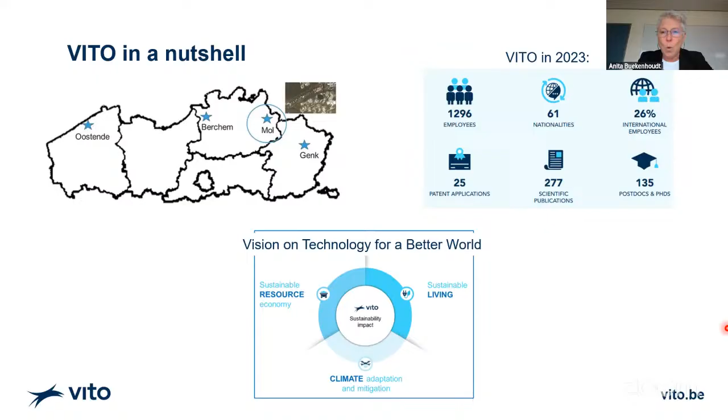One big part of what VITO does is applied research, meaning that we work together with universities, looking more to the fundamental research, and on the other hand work together with industry to find solutions for real industrial problems. This makes that we typically work at higher TRL levels, so from 3 to 7, coming already to pilot scale or demonstration.

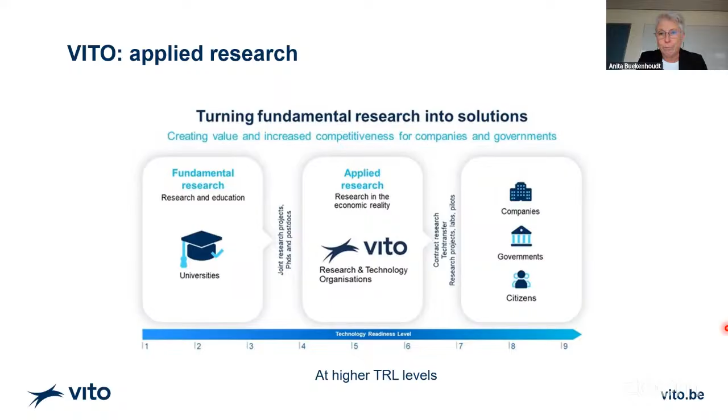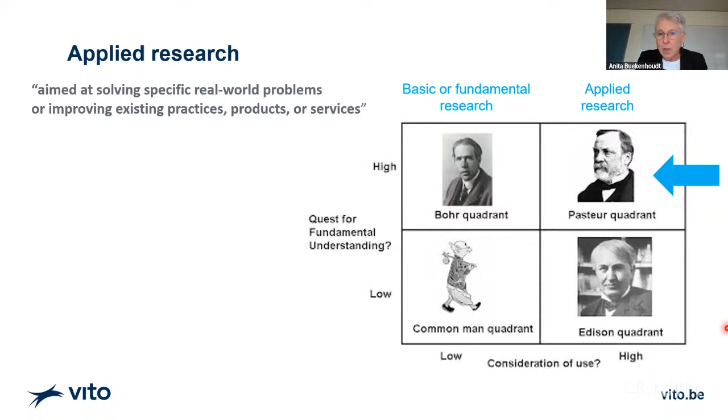Now, of course, when you work with industry, it doesn't stop with experimental feasibility. You also have to show them that it works long term, that it is a robust process at bigger scale, and that it's also economically feasible - because if it's not feasible economically, if there is no value there, it will never be implemented. On top of that, it's very interesting when, preferably, you are able to model your solution, the process, or model the transport of a membrane and predict it. That helps to implement it in industry.

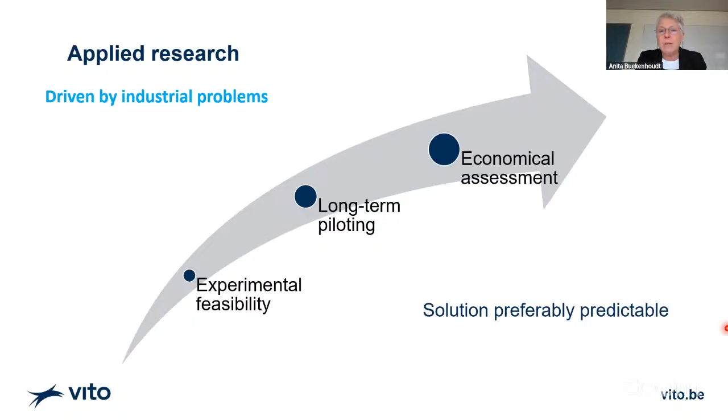So VITO in general is working in this way. I'm working in the membrane group, the membrane team that is nowadays called MESH, and our current focus has been on liquid separations. I guess in the future we will go back to also partly gas separation - we did it in the past - but for the moment, and my presentation is focused on, liquid separations.

Of course we all know that in chemical industry there's a lot of separations around, and these separations cost a lot of time and money, and they're mainly done now by thermal processes. So replacing them, being able to replace part of them by membranes, would lead us to a much greener chemistry. Now when we look particularly at separations in chemical industry, you're often dealing with very small molecules that need to be removed or fractionated. So we focus a lot on the tighter membrane processes, being organic solvent nanofiltration - that's been the focus from the start of this process - pervaporation, and nowadays a lot of membrane contactors, both membrane distillation and membrane extraction.

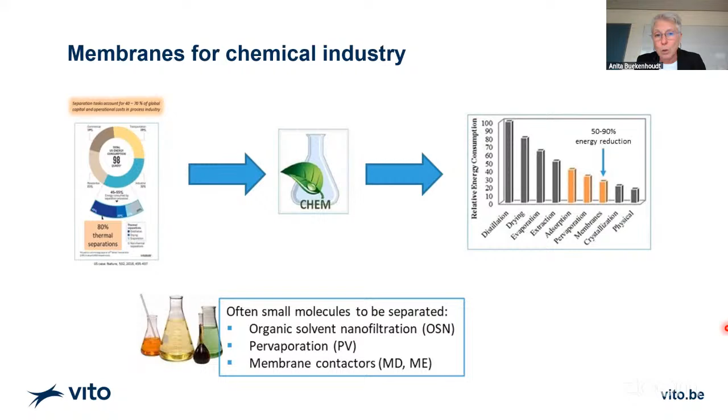We work with all types, a variety of sectors in the chemical industry, from oil and gas and base chemical producers up to more fine chemistry, and a lot with pharma. We have been working a lot with J&J. Janssen Pharmaceutica is really nearby us, so we did quite a lot of projects with them, and also a lot of biotech nowadays.

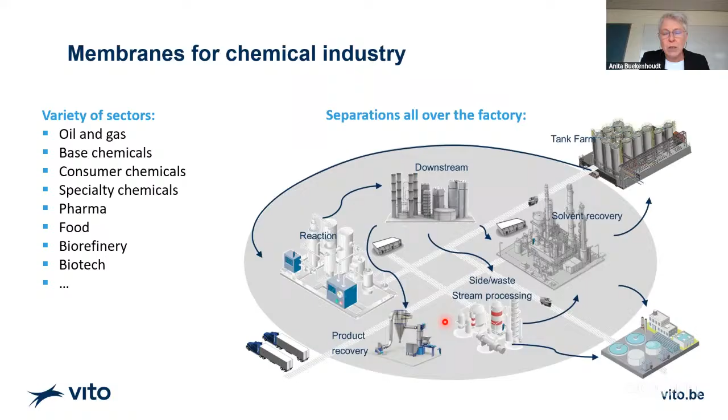Of course, we look at separations and replacing or adding membranes in every aspect of the factory, not only the reaction where we try to add a membrane to come to process intensification, but of course also downstream, solvent recovery, side stream processing, product recovery from the downstream and from the side streams. So we look at membranes everywhere in the chemical process. We've done projects all over.

So it also means that we do not only look at membranes on itself for purification, concentration, solvent recycling, but also hybrid processing, together with distillation to debottleneck distillations, or solvent recycling before an extraction step, or solvent swap before a lyophilization. These are a few of the examples we did.

And then, as I already said before, there's this integrated separation where we really couple the membrane to a reactor. So we can shift the equilibria, we can avoid side reactions. We did a lot on high dilution reactions to improve the solvent use, and we also did a lot in reusing the catalyst for a longer time in the same reaction. So in other words, that gives you the possibility to produce more with much less.

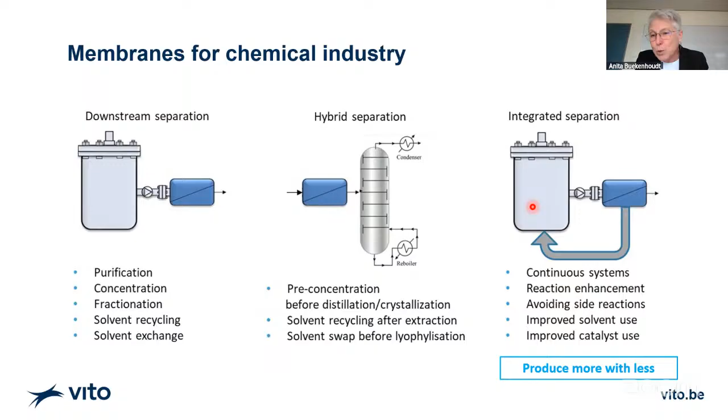Anyway, when you work with industry, there are some specific challenges or requirements. When you look purely at the membranes, they typically don't like you to work with something you have made in the lab that stays at lab scale. They want a solution, so it means they need the membrane that you propose to be commercially available at scale.

In our case, we always make our instruments very flexible so that they can work with polymeric and ceramic membranes. I have a particular affinity to ceramic membranes, but we only use them, of course, when it's relevant. It does not necessarily mean these are all membranes already on the market. They can also be in-house developed, but there has to be a clear track to bring them on the market. That's what the industry typically asks.

Now, as to operations, you stick to testing process parameters that are very close to what you will use when you implement this. For instance, if you have a pressure-driven process, you use cross-flow and not dead end. We actually almost never use dead end at Vito, because we've also seen a lot of differences, especially in solvents. So always cross-flow. When you work with pervaporation, this means you work with realistic vacuum. For membrane distillation, it means you work with realistic temperature differences and temperature levels. So anyway, you work with the temperature of the feed like it will be available in the company.

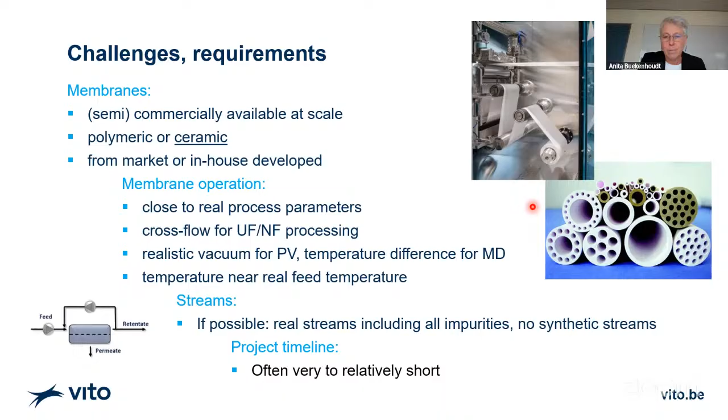So if you look at such a typical project, it starts, of course, with a membrane screening at liter scale. I give here the instrumentation that we have for OSN. We start with the selected membranes, polymer, ceramic. You see here it's flexible - this allows us to put many different types of modules here. So you see now a single tubular ceramic membrane, but it can also be a flat sheet polymeric membrane. Sometimes we already look a bit at temperature differences or the influence of transmembrane pressure.

Next step, when you have selected one or two best membranes, you go over to a proof of concept, but you do this already at a bigger scale. This bigger scale typically involves 5-liter feed vessels. This allows you a bigger membrane already in a module. So if you think of a polymeric membrane, you think of a 2540 or a little bit smaller module, spiral wound module for instance, which already has the potting material that you can test for robustness. In this study, we do the full process - full concentration, full diafiltration, this type of stuff.

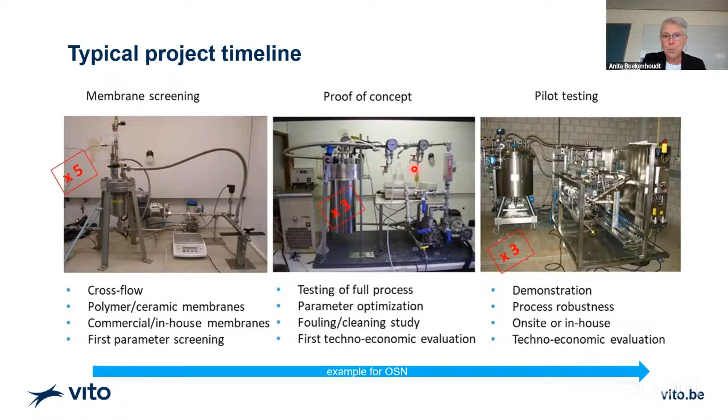As OSN is also very interesting for pharma, we decided at Vito to invest also in our pilots being GMP. So 2 of the 3 pilots are good manufacturing practice proof, let's say, following the rules that are applicable in pharma industry. And you see here pictures of the pilots we have in different projects that we started from small, from the screening up to the piloting work.

The first pilot we had, we had a very nice project together with DSM. It was the recovery of an API in a distillation residue that they were actually piling up because they knew there was still a lot of money in there, but they didn't know how to take it out. By just methanol dilution followed by concentration and diafiltration, we could really recover this API. It was done with membranes that they screened themselves. There was a very nice piloting campaign of about 1 year with 24/7 operation, not a lot of difficulties with fouling. So it was really a very successful project.

Later on, we did in the Netherlands a project with Bunge, which is an edible oil manufacturer, and we did their acetone recovery in order to intensify their distillation. And here we tested both polymeric membranes and our grafted ceramic membranes. I will say a little bit more about our membranes later. This was, I think, the first demonstration of our membranes at this scale. And there was also a good economical evaluation.

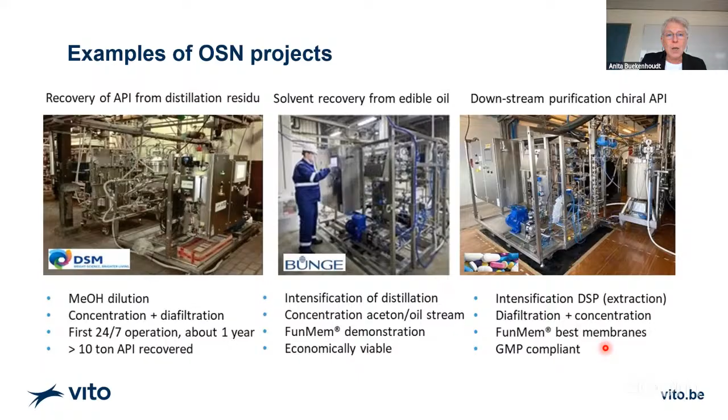Now, I'm gonna dig a little bit deeper into a few examples, telling you more how we work in detail. So the first thing is on the synthesis of membranes, so customizing surface modification of ceramic membranes in order to create flexibility on the ceramic membranes, which are typically metal oxide membranes with a lot of OH groups on the surface, meaning that they are typically very hydrophilic.

So we started back in 2009-10 together with a postdoc from University of Antwerp. We started developing a grafting method based on Grignard chemistry, and we did this not on flat sheet membranes. We did this directly on single tubular membranes where we know that the quality, the porosity, and so on is very similar to the next step, multi-channel membranes. If you do this on flat membranes, it's of course possible, but you will have to revisit your synthesis procedure again because there is so much difference between a flat sheet and single tubes. So that's what we did.

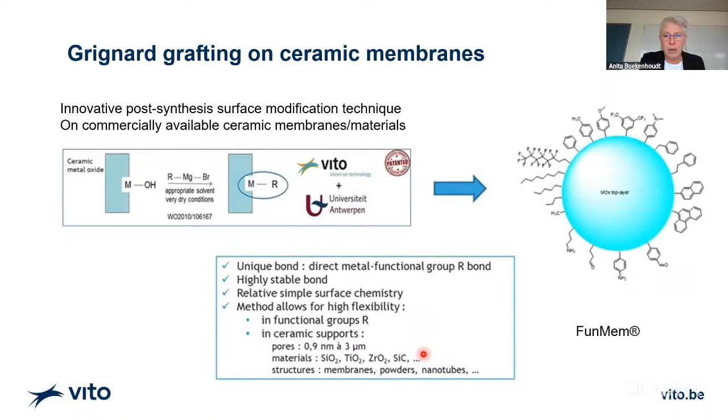We are very flexible in what we can make, not only in the type of groups we can put there. You see some of the possibilities that we made over the years, but also in the type of materials we can work with, the pore size, the materials. It doesn't even have to be membranes, of course. It's possible to work on powders, on nanotubes, on flat sheets. Of course, this has allowed us to what we like to call play with the affinity of the membranes.

And we did this in several ways. We had a very good postdoc, Sarah Hosseinabadi, who looked, of course, to solvent filtration. And we were able to show that by increasing the membrane solvent affinity, we get much better performance. And in some cases where we really boost the membrane solute affinity, you can find some kind of chromatography type of performance.

And we had about the same time another PhD, Ghulam Mustafa, who was digging into anti-fouling effects of this grafting, and we were able to show clearly that with metal grafted membranes, you can have really nice anti-fouling effects, higher fluxes, lower decrease of your flux, and in some cases, even higher retentions.

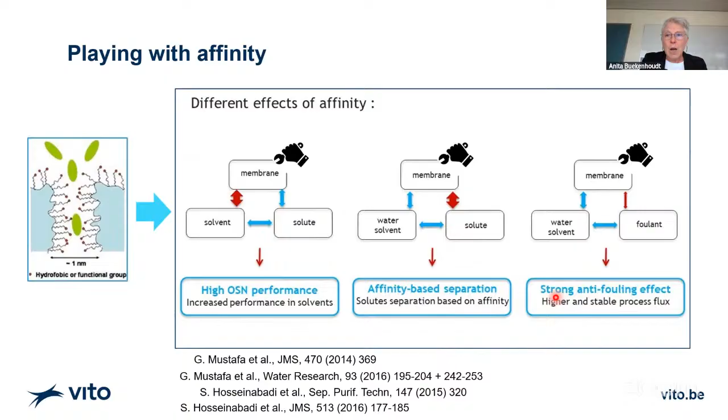Anyway, we were able to play around with our membrane affinity, and in this way, we were actually learning also a lot about what's happening in solvents and what's happening with fouling. So not in that aspect that we can really predict it, but we got clearly a lot of extra understanding.

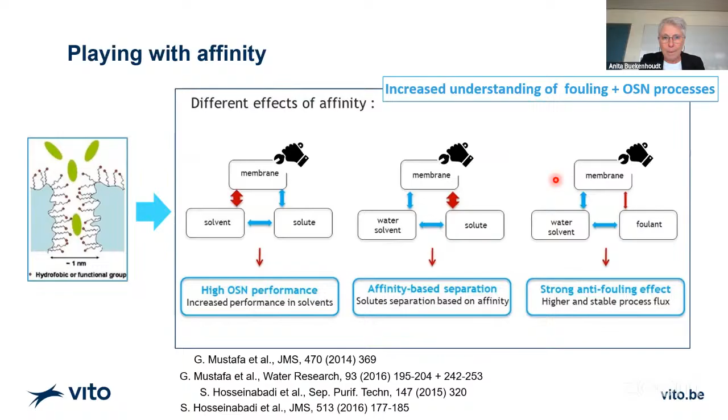Now, once we knew that this grafting gave us very nice membranes, we started to think about upscaling and how to make them on a bigger scale. So we started, of course, first with the small tubes in stirring and shaking instrumentation, glassware. But quite fast, we started working in a glove box. Grignard is not the easy chemistry. You have to work in very dry circumstances. So in a glove box and under filtration conditions.

This worked pretty well, and we used this glove box to extend it and be able to put a multi-channel membrane there of 1 meter 20. And also this, we were able to process very well. And then we went over in 2017 to build a machine where we could make 5 membranes at the same time. And then later on, we even upscaled this to 10 membranes, and also being a bit more flexible in the design of the multi-channel membranes we could work with.

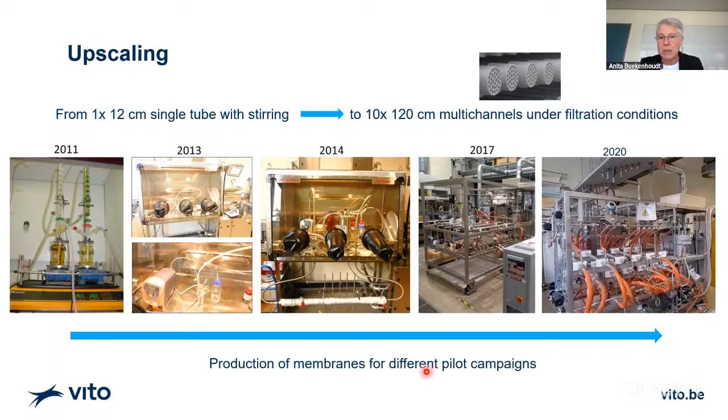Anyway, these two last machines gave us the possibility to produce these membranes for many different pilot campaigns, like I showed before. With the bigger machines, we were able to do also a very good economic evaluation to evaluate the cost of this grafting, to determine the factors that are the most important. And something like the dry solvent is very important here. And we could also pinpoint how to make it even better, how to change the process if you want to make larger amounts.

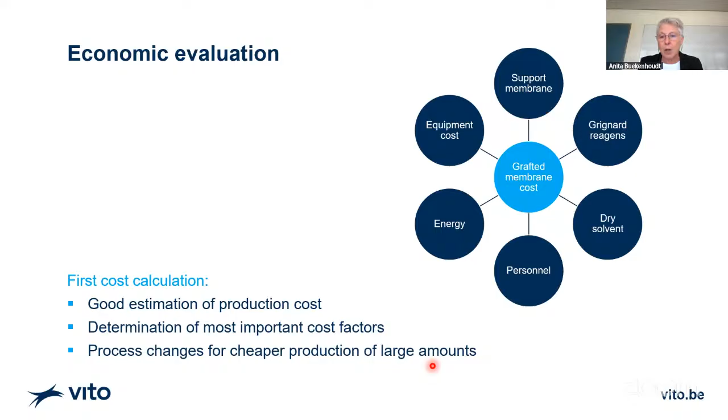And this has led also to the creation of the spin-off at the end of '21. It's called A-Membranes. It's led by Bart Koen, and he's building out this equipment now to really make large-scale production himself. We still have, of course, a good collaboration with all our spin-offs, by the way. A-Membranes is more in the first years after creation, but we had earlier very nice transfer projects.

And I just mention here the Zirfon separators. This Zirfon stands for mixed matrix membrane, zirconia particles inside of polysulfone, and they turned out to be very good separators with better performance in alkaline electrolysis. And it's, of course, boosting because of green hydrogen production. We have been working for a long time now with AGFA on this topic, and they brought the first generation of membranes on the market in 2007, and they're running more than 100 installations now. They also recently got very nice extra funding to upscale production of even further generations of these separators.

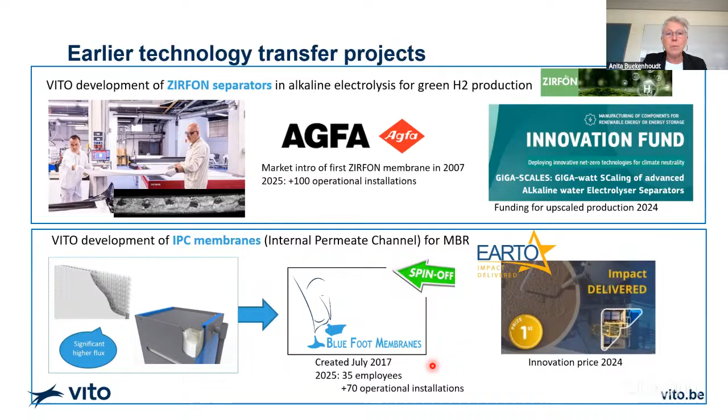And more recently, we had IPC membranes, internal permeate channel membranes, backwashable membranes typically for MBR, with significantly higher flux. We had there the creation of the spin-off Blue Foot Membranes in 2017. They're doing very well. They have 35 employees. There are a lot of operational installations, and they just got a very prestigious prize last year. So that's a bit how we deal with synthesis of membranes at VITO.

Now let's have an example of use of membranes, and I dig in here a bit deeper into a project that is still running. It's now in the last 6 months. And it's dealing with re-refining of used lubricant oil. The project is called CUMERI, nice consortium.

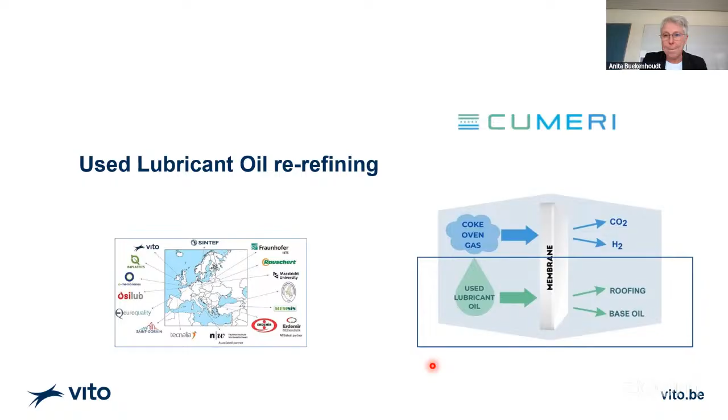And used lubricant oil is actually very well collected, especially in Europe. And a big part of it, 1 million ton each year, is re-refined, mainly by distillation now, by 27 refiners in Europe, bigger and smaller ones, that deliver again clean oil that can be used to make pure lubricant oil again that can be reused.

Now, if you look to what is in this used lubricant oil, like you see, it's of course nicely black, like it comes out of your car when you replace the oil. What's in it is, of course, the base oil that is typically used to make these lubricants. And there are also a lot of additives in lubricant oil. These additives give you the lubrication effect, but they also avoid wear and corrosion. These additives are typically surfactant-like molecules, like you see here, and they typically contain metals.

These give you, of course, a lot of impurities in the stream, and there are also minor impurities coming from the use, which is water, diesel, and naphtha. Of course, lubricant oil in itself is very viscous, but this dirty oil is especially viscous. We talk here about kinematic viscosities, 50 centistokes at 40 degrees. So it's really challenging, and that's where we think of using membranes at higher temperature, particularly ceramic membranes. The idea is to remove everything that doesn't need to be there and end up with a nice brownish colored base oil.

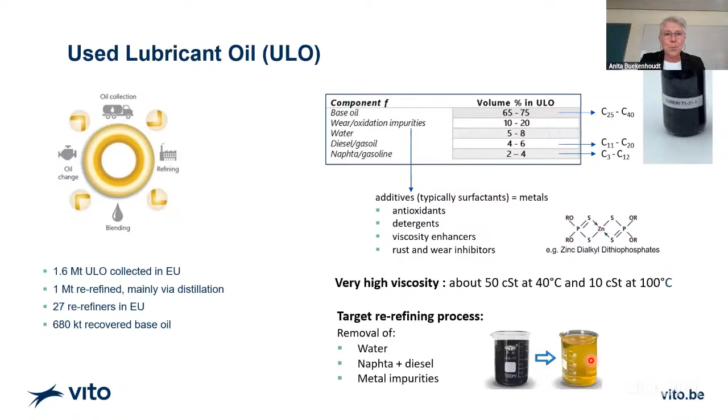Now, typically, such a re-refining process is currently done with evaporation or a lot of distillation processes. It's a quite tedious distillation. Often there is a pre-treatment before to remove the water, and often there is a post-treatment with hydrogen to remove the last bits of sulfur. In this project of CUMERI, we work together with a French company, Osilub, located in Le Havre. It's actually a collaboration between Veolia, the collectors of the waste oil, and Total, that can use the refined oil to make new lubricants.

You see their process here, and it's a three-step distillation with the first column at relatively low temperature to remove the water, then the second column to remove the diesel already at 260 degrees, and then the last column, the real column, giving you the removal of the impurities, which is under vacuum and at 350 degrees. This gives you the base oil, and on the bottom it gives you a roofing type of material, so really very viscous material. They're one of the bigger refiners in Europe. Now, for us, we want to find an alternative with ceramic membranes.

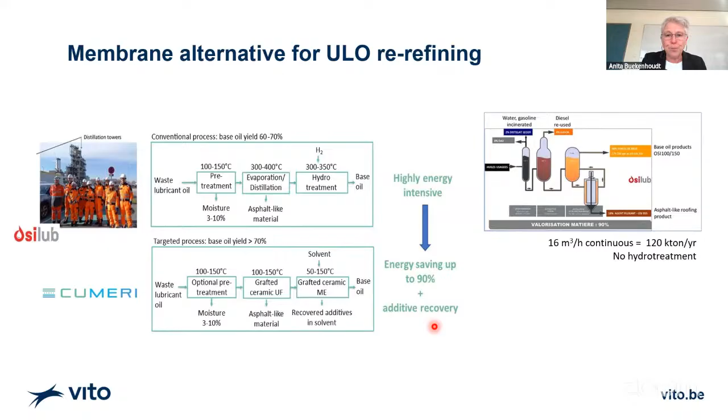In the beginning, we thought of this process. Maybe we still need a water remover or another pre-treatment. And then ceramic membranes, to remove most of the metals and to create this asphalt-like retentate, and then a polishing step by membrane extraction. By this, we would be able to reduce a lot of the energy use. First, we did a few experiments. We had some experience there, but already in the first 6 months of the project, we performed a preliminary economic evaluation. That is very interesting to do. So we compared the Osilub process, we had very good information from the company, with our targeted process.

We looked at the capex cost, investment cost, and the operational cost, and we saw very quickly, but that's not so strange, that it's cheapest when you don't have to do any pretreatment. And when it is possible to remove this, you have a capex cost that can be 2 times lower than the benchmark, while the opex cost is about the same. And it's actually driven by this blue part here, which comes from the cost of the used oil. So Osilub has to pay Veolia to be able to work with the collected oil.

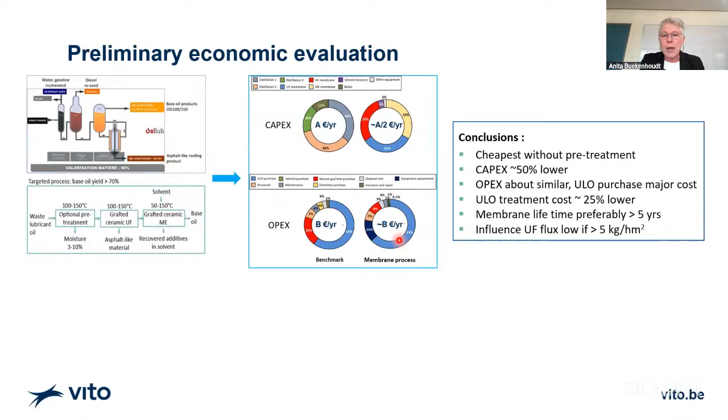Now, you put in membrane fluxes and membrane transfer coefficients that you get from first experiments, but it's a bit a question mark where you're going to end up. To cover this, you typically do a sensitivity analysis. We did this here for membrane lifetime and for the UF flux. The black curve is the cost without any pre-treatment, others are with pre-treatment, and the blue line is the benchmark cost. So as long as your membrane has a nice lifetime, preferably longer than 5 years, it's fine. It's not necessary that it is 10 or 20 years, because the cost doesn't change a lot. Also, in view of flux, it gives you a target that your membrane flux doesn't need to be much higher than 5 LMH.

So this, or kilogram in this, per hour per square meter. So these things are very interesting to get some targets for your membrane, even when you start such a project. And we had actually a specific PhD which did only economic evaluation for membrane extraction in three very different applications. She has made three papers about this. You can find the solutions there. It's very interesting what can come out of a very early economic evaluation in view of membrane targets, material targets. So I would recommend it.

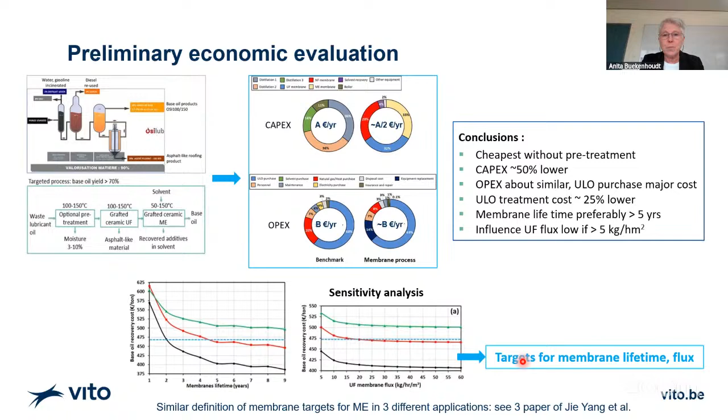And we have a second generation of grafting, which is polymer brush grafting. So he used all this to have really a huge amount of membranes, which we tested all at 110, 120 degrees. Of course, then your loops have to be very well isolated, otherwise you cannot keep this. We're working on a paper. It will be submitted very soon on the full results of this screening.

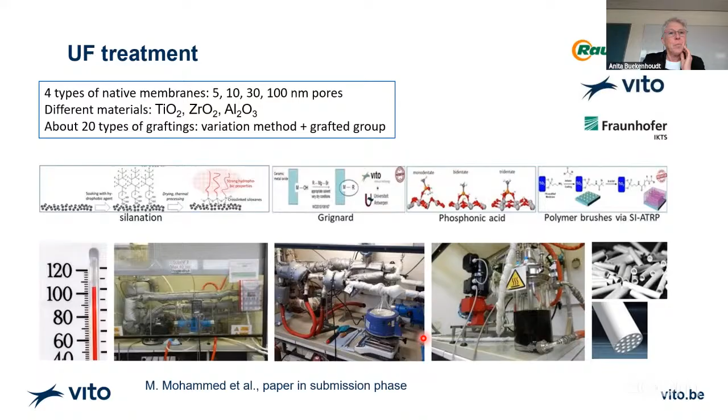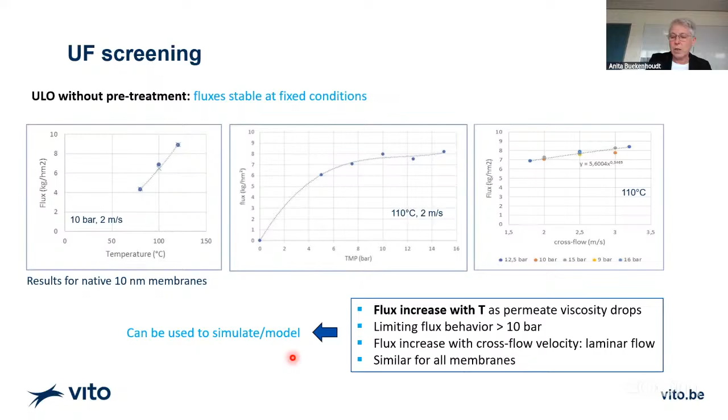And it's also valuable to increase a bit the cross-flow velocity. And this evolution is actually following the laminar flow behavior. Very similar for all membranes. And this knowledge can be, of course, used to simulate, to model the process. And you see here what the permeate quality is like. You see a lot of parameters here.

First, the water content, viscosity, acidity number, oxidation, nitration level, diesel, naphtha, and then all metals that you can find in this stream, divided into additive metals, fouling metals from, for instance, sand, silicon, and then everything that can come out of the motor, aluminium, iron, these type of things. So in blue, you see the feeds. In orange, you see the permeate of the 10 nanometer native membrane in this case. And then in green is the product of OSIL150. So this is our goal.

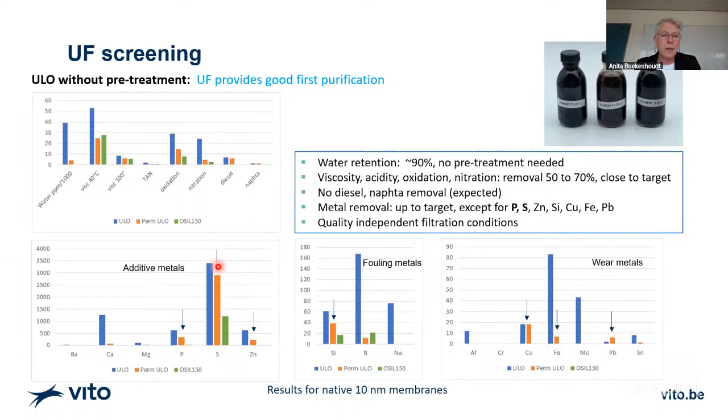You see that the UF is actually doing a very, very good first purification. And unexpectedly, we had a lot of water removal. And the water is probably complexed, emulsified. It's not very clear in this stream, giving us this over 90% retention. All other parameters, you see a very nice removal, becoming very close to the goal. Of course, diesel and naphtha are not removed. And then in view of metals, we remove a lot of them, except for these with an arrow. And especially sulfur is probably very small molecules, and it's impossible to remove with UF.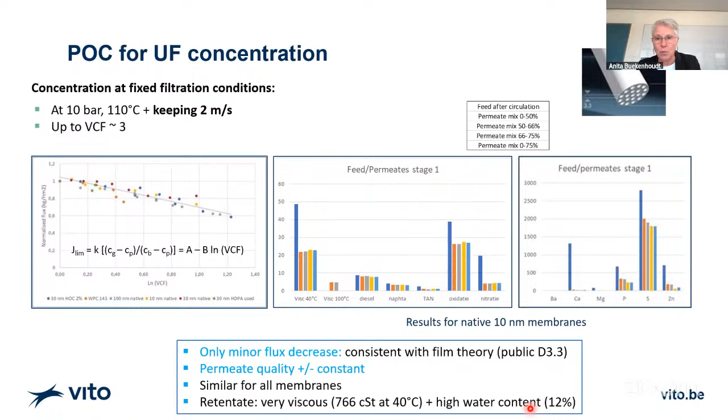And of course, in the end, we have a retentate that is enormously viscous, where you need to keep your high temperature to get it out of the unit. And the water content you find in the retentate is consistent with our 90+% retention of water. So, okay, this is the UF process. We have a polishing step after that, which is ME. Of course, we did screening first too.

Screening in that case is liquid-liquid extraction tests on the UF permeate that we made in this concentration tests. And yeah, a lot of solvents are possible. Very interesting are ethanol, NMP, DMA. And we saw actually that there is a very nice correlation with the Hansen parameters and the extraction efficiencies. And if you're very high in extraction efficiency, you also have nice decoloration.

Also, in most cases, you form very strong emulsions, very difficult to phase separate. So using a membrane in the process is very advantageous. And of course, for membranes, we go for hydrophobic membranes made by silanization by our Fraunhofer partners. And we work with 100, 200 nanometer membranes there.

We are very happy to have Basel high school there, and they've done a lot of testing also for membrane extraction, and they have tested over 14 days the very robust process with ethanol at, in this case, relatively low temperatures. The mass transfer coefficient is then relatively low, but by now we know we can increase this by using high boiler solvents, of course, and using much higher hydrodynamics.

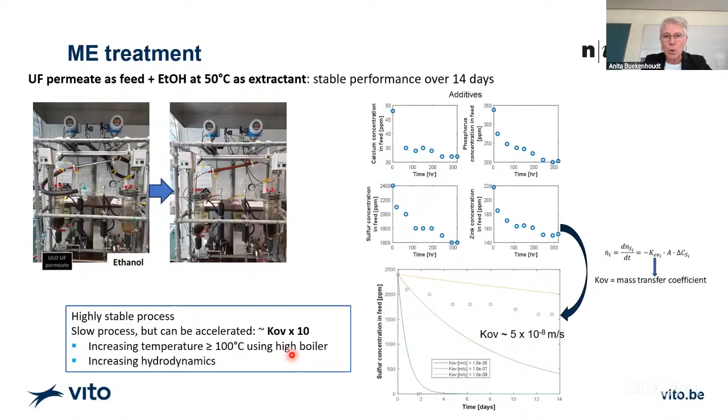Now, as we always do, we want to pilot this, and we are doing this right now. We use for that one of our high temperature pilots that can work until 130 degrees. We adapted it a bit, in this way that we have now a back pulse possibility on the pilot. And we can use this backflush system also as the extractant loop of the ME. So it gives us a possibility to test both UF and ME.

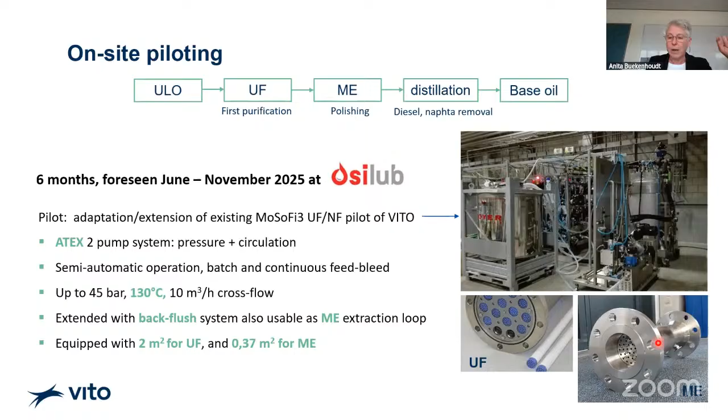You see here we chose 8 multi-channel membranes for the UF part, having 2 square meters of membranes, and then a 0.37 square meter single tubular module for the ME part. You see nicely how after testing at Vito, we transported to Osilub, and that's where it is located. You see a few pictures here.

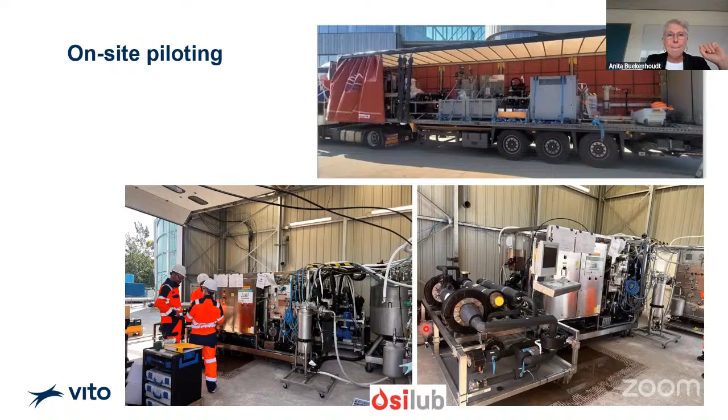There is also very long stability of the flux in isoconcentration mode. We could restart with a new batch of ULO after just a short permeate rinse, so there are really no big fouling issues. It's an extremely robust process. We can conclude this. And ME piloting is going on right now, and we will, of course, present the results later on in other presentations.

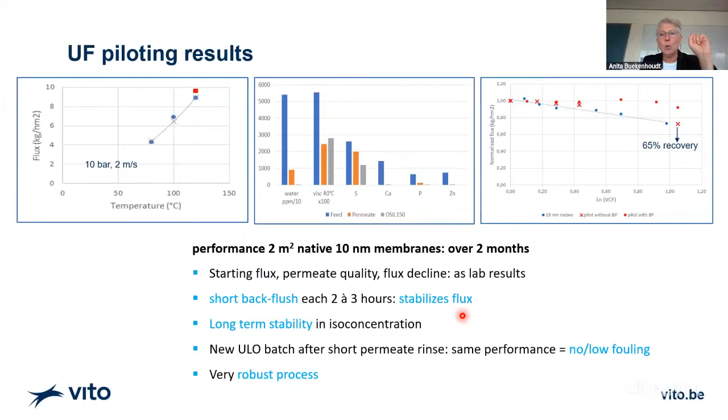So we had a synthesis project presentation. We had a presentation of an application project. Let's now look at what we do right now at Vito on prediction. And of course, lots of us learned a lot on OSN, but not to this level to predict the OSN process. And then, like Gyorgy and his team are doing at KAUST, we look at data-driven modeling here.

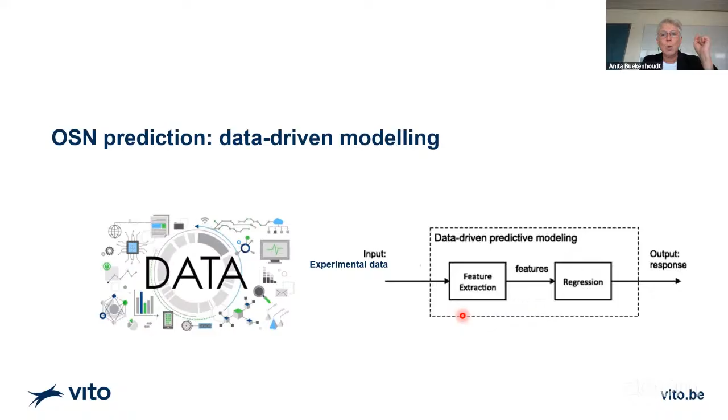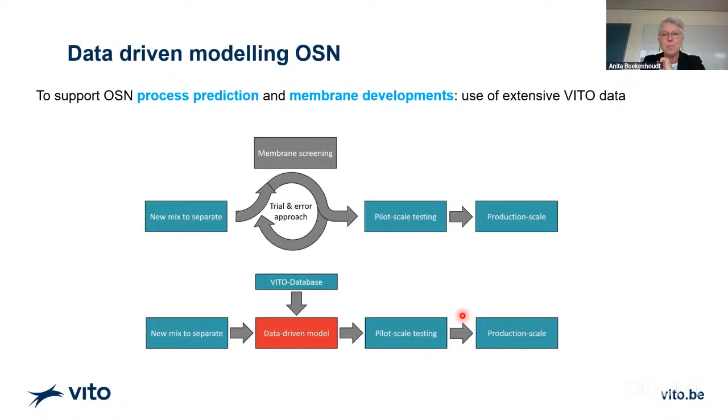And of course, we want to use the extensive data we have at Vito in order to, on one side, get rid of the very intensive and time-consuming membrane screening, but also the other way around, to be able to define the best membrane with the best chemistry for a particular separation. Now at Vito, our data, especially in solvents, we have a lot of ceramic data.

And the good thing about data sets from ceramic membranes is, of course, that these membranes are not swelling. So meaning that there is one effect of OSN of the solvent that is not there. So I always looked at it when somebody can disentangle what is happening here.

The ceramic data is very important, or can really help here. Of course, we characterize the solvent, the solute, and the membrane and the test conditions by different parameters, like we all do. And we compared a bit the KAUST database. I didn't look yet at the database from Leuven, the bigger database. And you see here the KAUST database in blue and the Vito database in red.

So in general, our ranges of parameters are in general bigger. This is, of course, because I think ceramics are, and with grafting, we are more to the polar side and intermediate polarity side, and a bit like I mentioned in the beginning in the questions of Gyorgy, we are a bit on the higher pore size compared to the polymeric membranes.

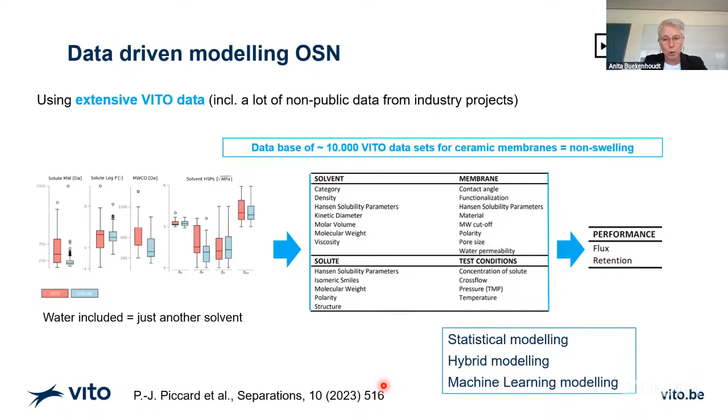Okay, you can see some of the background in Peter Jan's first publication. What he is doing is looking at different types of modeling, not only statistical modeling, but also hybrid modeling and full machine learning AI modeling.

I show here some of the results that he recently published. And we focused here on results of NF membranes, 0.9 nanometer, titanium membranes, 450 Daltons, native and C1 grafted with our Grignard grafting method. And we looked first statistically to the results.

You see here the correlation between flux and flux times viscosity. Flux times viscosity are the higher bars as function of different aspects, different parameters, different solvent parameters, solvent characteristics. And actually, what we see is there are huge correlation coefficients. Actually, solvent has a huge influence on the flux.

Not only you see here a lot of polarity characteristics, but also the size of the solvent is quite important. And what we see also is, of course, if you take out already one part of the viscosity effect by multiplying flux by viscosity, correlations get higher.

And the correlations for a grafted membrane are really much higher than for native membrane, meaning actually that for the flux is almost only defined by the solvent, while for the native membranes, solute has also a big influence. And this is all to do with the better affinity of our grafted membranes to the solvent, but also to the diminished interactions with the solute by using particularly this C1 grafting, something we saw also in the fouling studies.

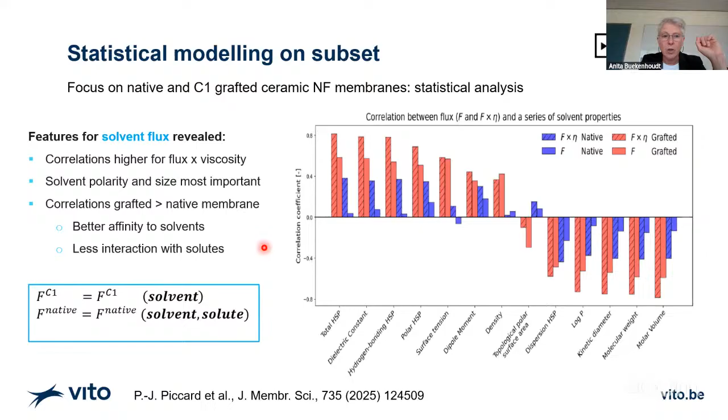Also for retentions, we looked at correlations, and in general, they're much lower, but they're higher in this case for the native membranes than for the grafted membranes. Even when you look to scatter plots here of these retentions as function of flux, you clearly see it's all over the place for native, not a lot of correlation there. And it's very systematic for the grafted membranes.

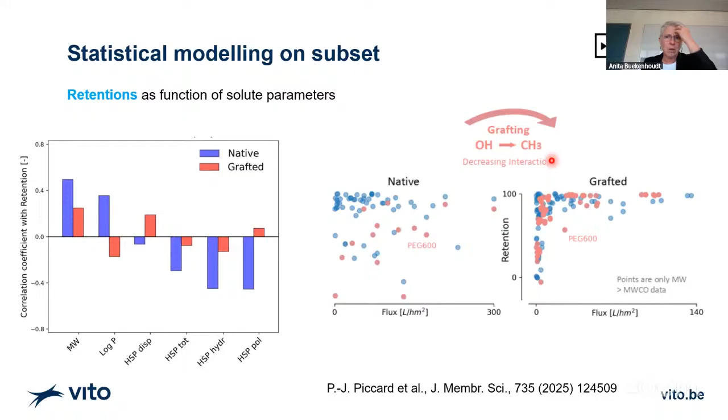Also here, we believe this has to do with decreasing interactions with the solutes. When you dig a bit deeper, we have been, and it's often used for ceramic membranes, the Spiegler-Kedem theory gives an interesting way to look at the results. And we see here that we can actually model this behavior for the grafted membrane with only one parameter varying.

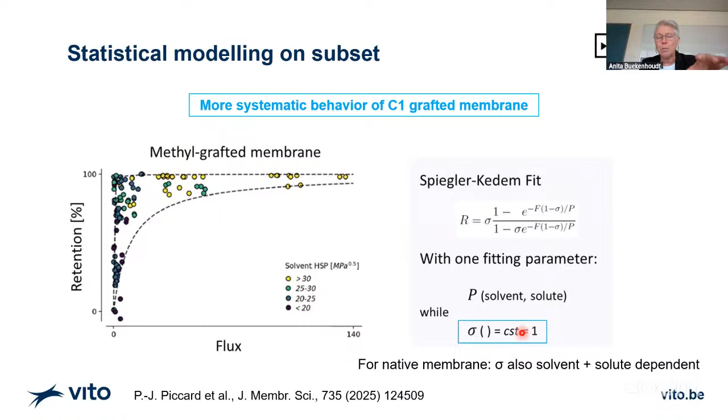We looked, of course, to molecules here that are bigger than the pore size of the membrane. So for these molecules, sigma is 1, and there is only this diffusion parameter here, which is varying for different solvent-solute mixtures. And while for native membrane, both parameters are important and are dependent on the mixture.

Of course, we looked already at the full machine learning and AI modeling. We trained with all the data we had, and we defined, we did new experiments with new data, and we got some new data, and you see that there is a quite nice prediction, 81% accuracy here.

Now, Peter Jan is working on hybrid modeling, different ways of hybrid modeling, including physical constraints of the full AI in various ways and looking to the differences between the results. And the paper is also here in submission phase. So this is definitely going on further. We will elaborate much more on this later.

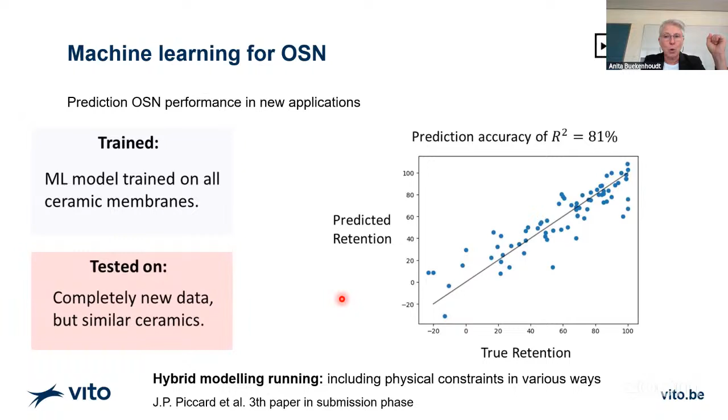So this brings me to the end of my presentation. I think I could show you that doing applied research, working with companies, comes with its own rules, dynamics, and challenges. Typical aspects are: you need experimental feasibility with real streams in real conditions with commercially available membranes, proof of concept of the full process at scale including things like the potting material or the O-rings for sealing of ceramic membranes, economic feasibility, and the ability to show long-term process robustness at pilot scale. Process modeling and predictability is also an extra asset, and we're working more and more on this aspect.

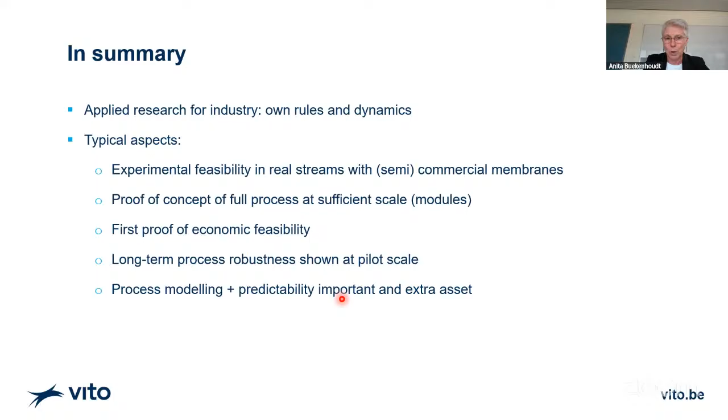With this, I have to thank all past and current team members. My experience extends a lot across Belgium, especially also Netherlands and EU projects, and I've had many collaborations with academic and industrial partners. They are all thanked very well. With this, I also have to thank you for your attention.